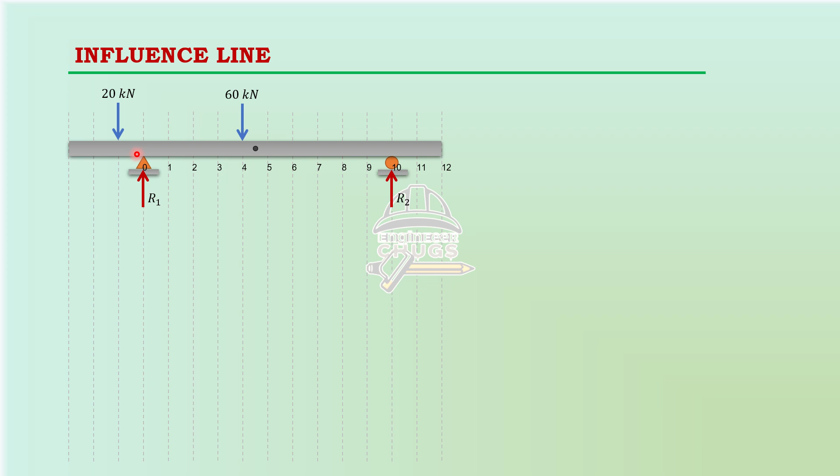Okay, so summation of moment at B, we have R1. Yung RA natin is R1 times 10. Tapos 60 times 6, the distance is 6 meters. And then yung 20 natin is 11 meters yung distance. So we will get the value of RA or R1, 58 kilonewton. That is for the basic na pagkuha ng reaction. Tapos summation of forces vertical, makukuha mo yung R2.